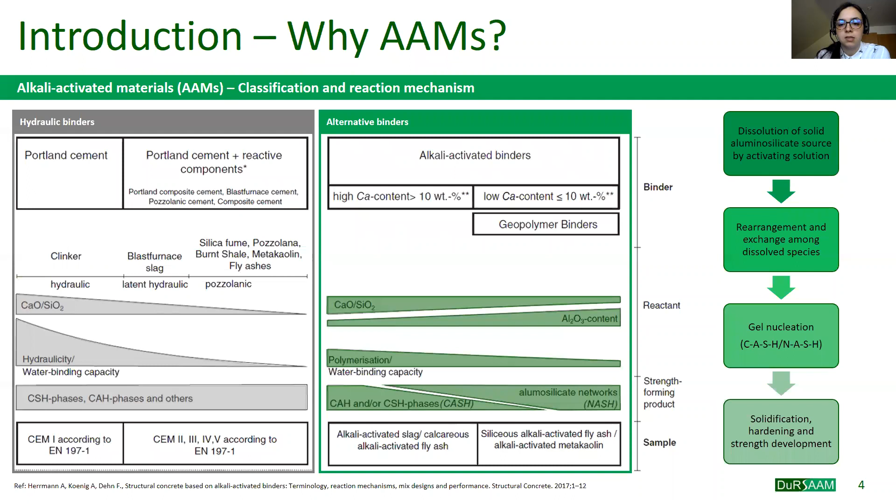Talking about fiber-reinforced concrete, this type of composite has found in the last decades a wide utilization in both structural and non-structural application in the construction field. So why should we use alkali-activated materials instead of traditional concrete? Previous researches demonstrated that alkali-activated material can be a suitable alternative to traditional concrete, not only from an environmental point of view, but also from a mechanical point of view, as they show similar or even better performance compared to traditional concrete.

In addition, this type of materials can show better durability performance, such as a better resistance to chemical attack, chloride ingress, and fire resistance. For this reason, the addition of fiber into the alkaline matrix can improve the durability performance because the fiber can mitigate crack propagation and also increase the load-bearing capacity even in a cracked state.

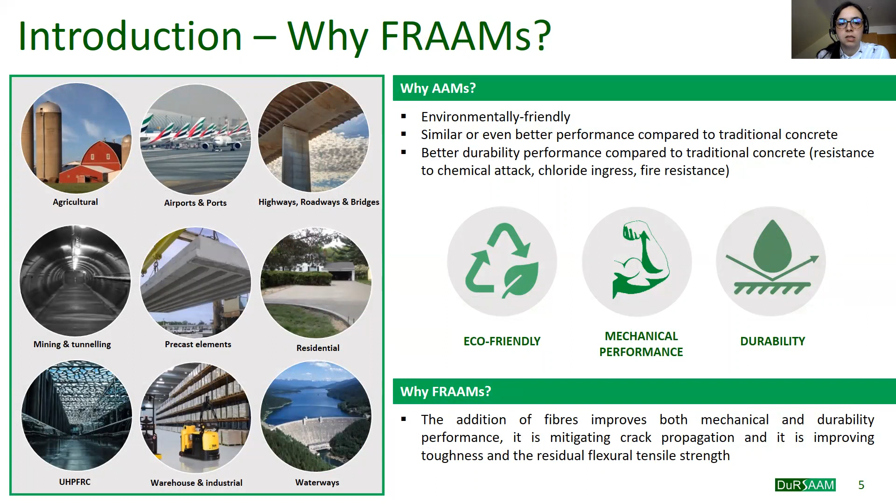In hardened plain concrete, microcracks pre-exist even before any stress is applied, mainly due to shrinkage and thermal deformation. When a tension is applied, the microcracks start growing at the weakest link of the composite, which is the aggregate matrix interface. The microcracks start growing and they propagate in an unstable manner until crack localization. In plain concrete, only aggregates can bridge the crack.

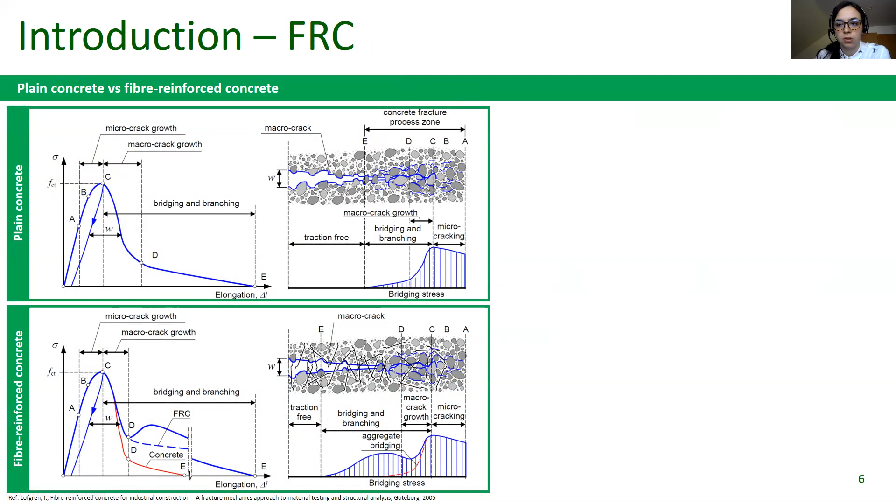However, in fiber-reinforced concrete, the bridging capacity of the aggregates is widely improved by the incorporation of fibers, which can bridge and branch the crack, improving the fracture energy and the toughness of the material. However, the performances of a fiber-reinforced concrete are affected by different parameters. First of all, the fiber material. Both organic and inorganic fiber can be used as reinforcement into traditional concrete.

For example, steel fibers can be used to improve the mechanical properties and in particular the flexural post-cracking behavior, while microsynthetic fibers can reduce shrinkage deformation. However, in addition to fiber material, also fiber shape and geometry, distribution and orientation, and especially the number of fibers crossing a crack can affect the performance of the fibers and the final properties of the composite.

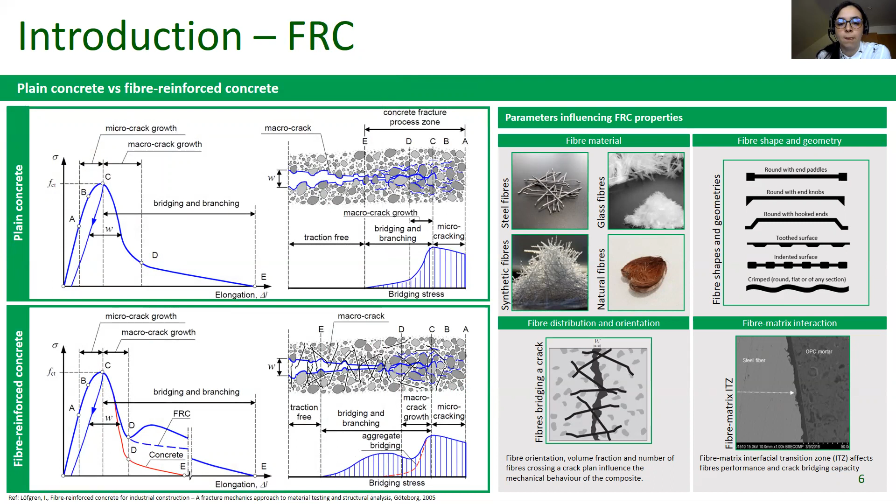An important role is also played by the fiber matrix interaction and especially by the interfacial transition zone between the fiber and the matrix, because this is affecting the short-term and long-term mechanical performances of the composite.

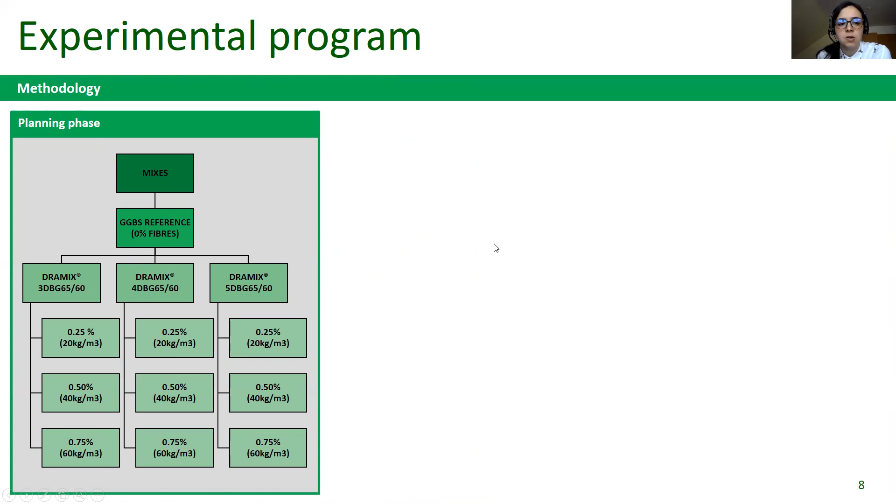This research work was defined following three different phases. A first planning phase in which binder, mix design, fiber type, and volume fraction were defined. A casting phase in which all the samples were prepared, and a testing phase in which the samples were tested according to European standard. Cubes were tested to evaluate the compressive strength development during time, and 3-point bending tests were performed to evaluate the flexural post-cracking behavior of the composite.

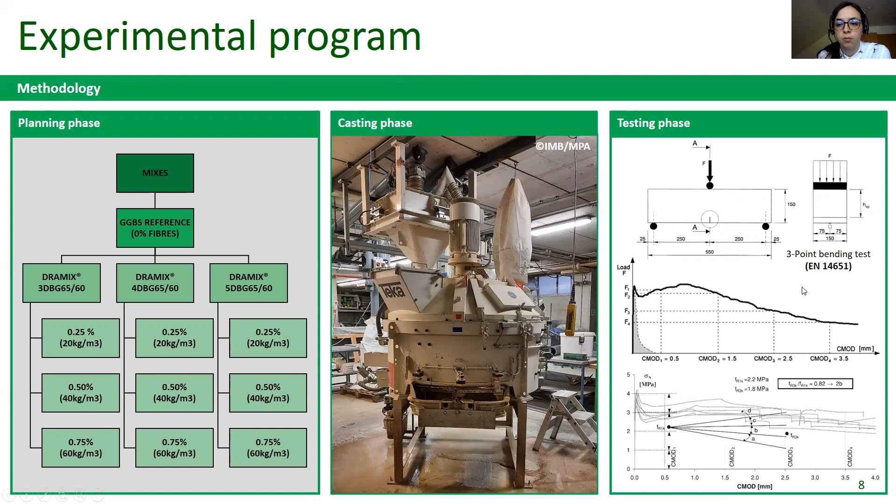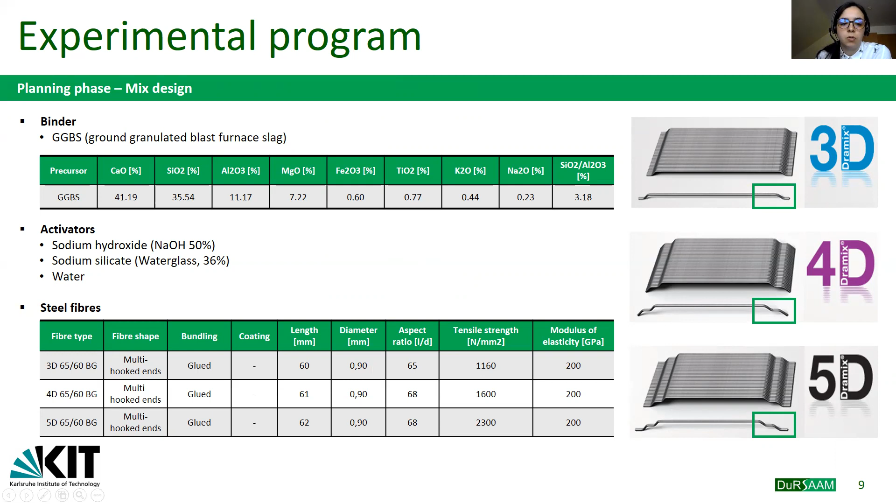In the planning phase, after different trials, a good workable mix with a good setting time and a compressive strength higher than 30 MPa after 28 days was developed using blast furnace slag as binder, sodium hydroxide and sodium silicate in combination with water as activators, and 3 different Dramix steel fibers were used for this investigation.

During the casting phase, all the 10 mixes were prepared following the same mixing procedure and applying the same curing condition. A total of 120 cubes and 60 beams were cast. 3 cubes after 1, 7, 14, and 28 days were tested to evaluate the compressive strength development during time, and 3-point bending tests were performed on 6 beams for each mix, following the recommendation of the fib Model Code 2010 and the European Standard EN 14651.

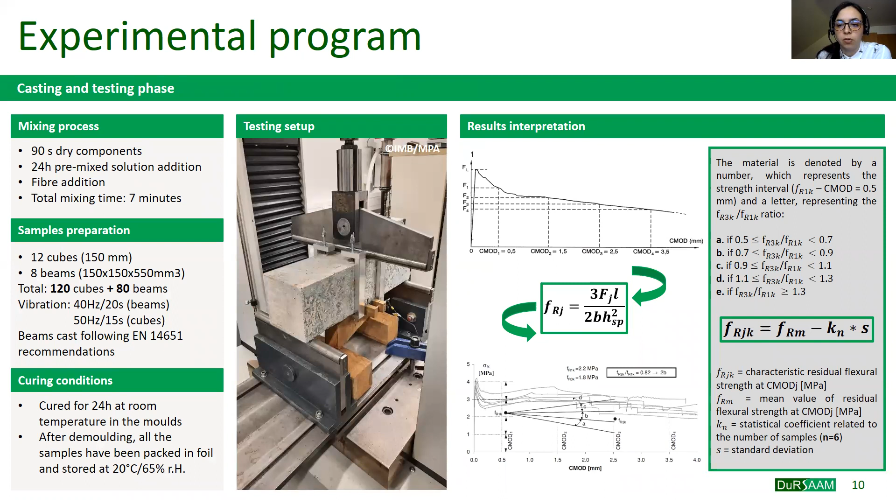3-point bending tests were performed on notched beams, and every mix was classified following the recommendation of the fib Model Code 2010.

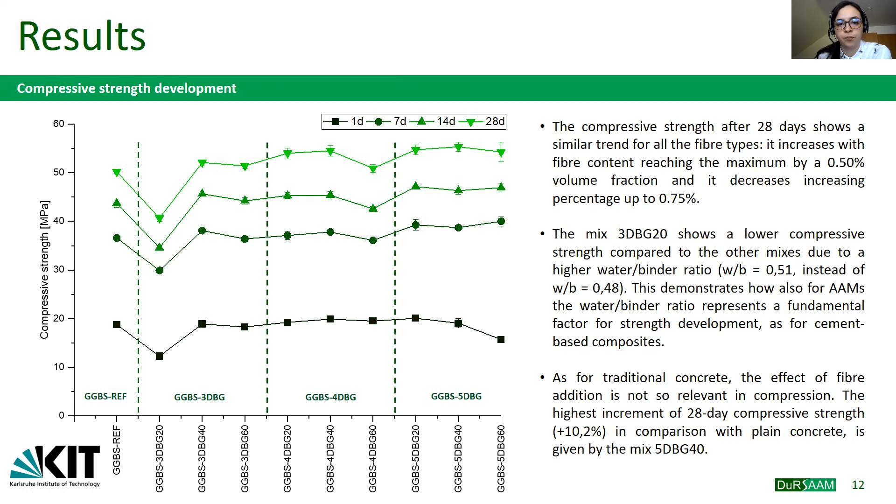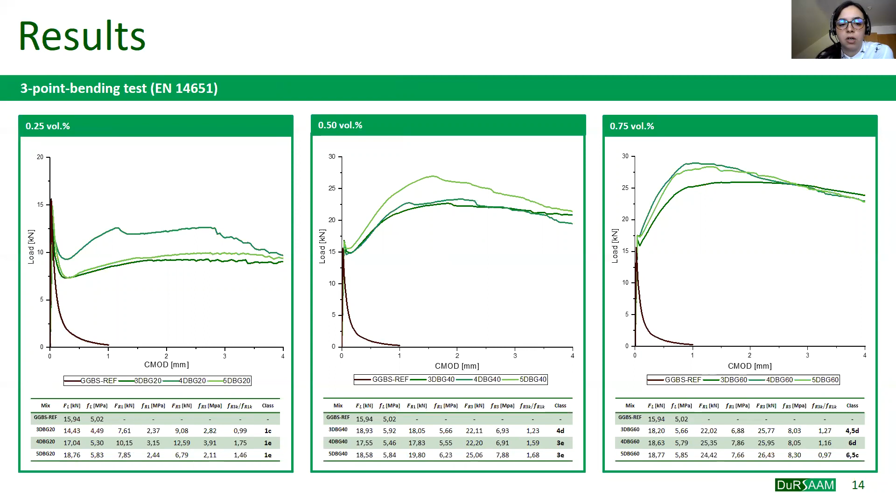In this slide, instead, we can see the load-CMOD diagram for every fiber percentage. And as we can see on the left, with the lowest fiber content, so 0.25% volume fraction, the best behavior is obtained with the Dramix 4D fibers, while 3D and 5D perform very similarly, even if they have different performances and properties; especially the tensile strength of Dramix 5D is almost double that of the 3D. This behavior could be due to the compressive strength of the matrix, which is not high enough to allow the 5D fibers to perform at their best.

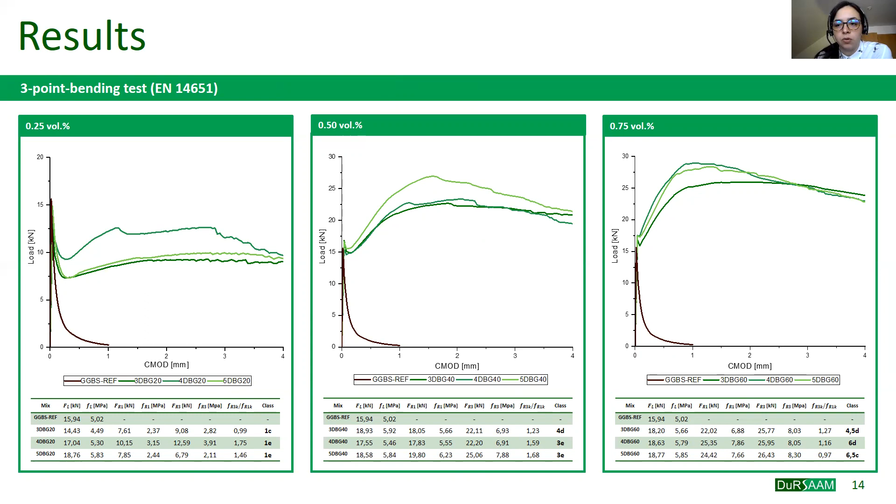With an increase of the fiber content from 0.25 to 0.50 or even to 0.75, the performances of the fibers are quite similar, even if the 3D fibers are the ones with the lowest post-cracking residual flexural strength. And 4D and 5D almost perform in the same way. And this is also due to the same explanation given before.

From the experimental results of this investigation, it was possible to evaluate the behavior of fiber in an alkali activated matrix, and it's possible to say that the addition of fiber positively affects the post-cracking behavior of the composite, and that different fibers with different geometry behave in a different way. However, additional investigation and experiments are needed. In particular, direct and indirect tensile strength tests need to be performed to fully understand and characterize the material and to define correlations between the mechanical properties as for traditional OPC concrete.

For this reason, OPC-based mixes with the same fiber types and fiber percentage as the alkali activated matrix need to be cast and tested to evaluate if the same fiber with the same volume fraction can behave in the same way in different matrices, both traditional concrete and alkali activated concrete. In addition, casting and testing OPC-based mixes will help to understand correlations between the mechanical properties and also to evaluate if existing models and equations for traditional concrete and traditional fiber reinforced concrete can be applied for alkali activated materials.